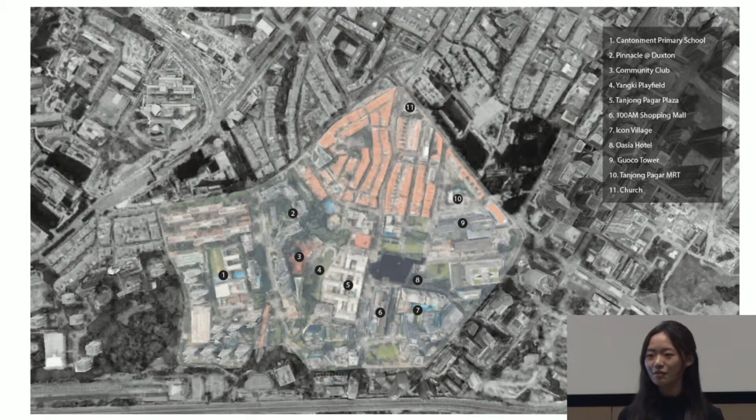Then I began to look at the voids and the edges within the Tanjong Pagar area and found the cracks between the buildings, and found the opportunities, which I named a new urban void.

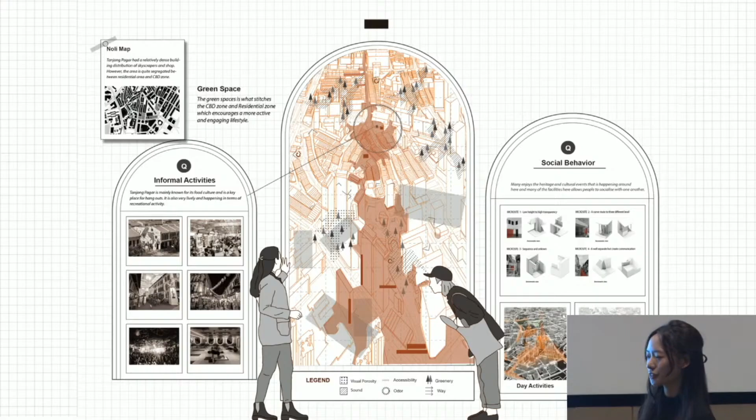So in this project, I want to propose a new typology for social unity and the living essence of heritage. I will begin to explore my project through spaces, structure, and program.

First is how I explore my design space in this process. First, I'm learning and activating from the informal microsites that people used to gather in society. As Henri Lefebvre says, the city is made up of rhythms—of people, of objects, of spaces.

Therefore, I use rhythm analysis to look at the voids and the cracks inside this society, and I found some conflicting rhythms—that migrant workers and locals tend to stay at places that are informal and unpolished, like the spaces in back alleys or under HDB buildings.

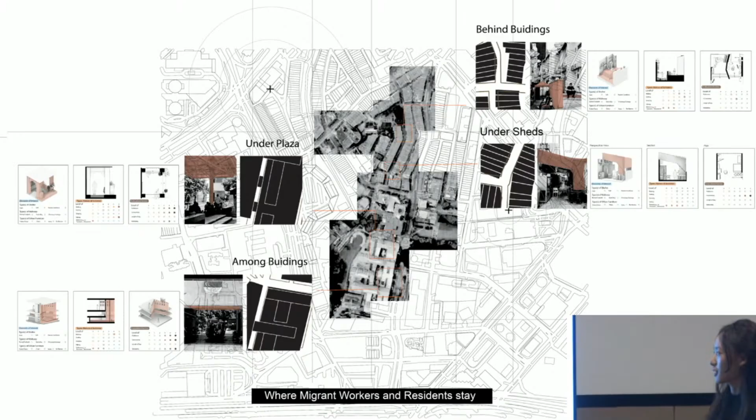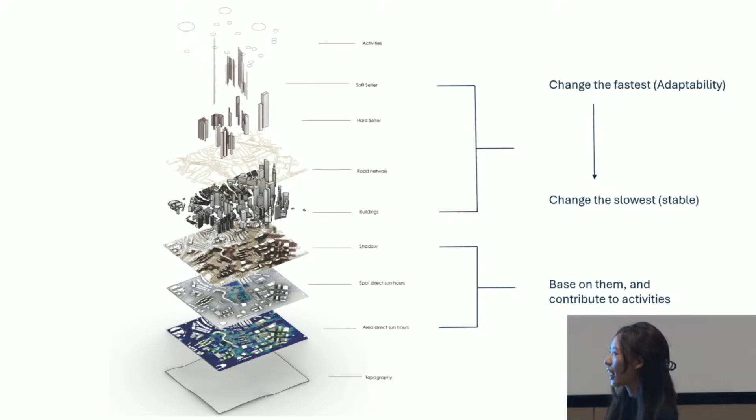And they often build up their own soft shelter there. So the contrast between the soft shelter and the hard shelter has inspired my investigation into how flexibility and human scale can reapproach our means to architecture.

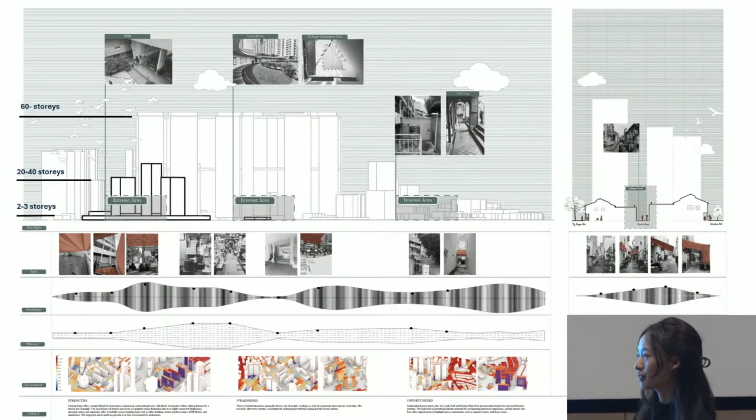Especially since Tanjong Pagar is a place full of contrast, from the tallest building in Singapore to the smallest traditional building on Trust Street.

The second is about the structure. As a foreigner looking at Tanjong Pagar's urban evolution, I found a strong tendency toward eliminating randomness.

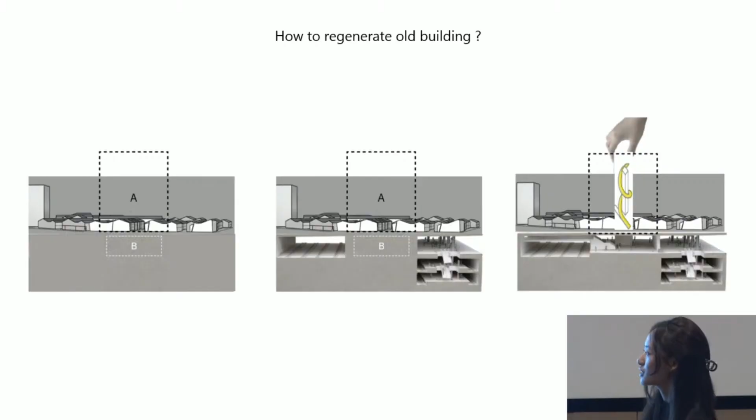So how can we regenerate the old building? I propose that by activating different layers of the buildings, we can open up new opportunities for the locals and different people around the world.

Last but not least is about the program. This is the DNA of my design—the different festivals of different ethnic groups, people around the world. By carefully tackling the spatial quality and the common materials used in those festivals,

we can create a space where people can celebrate their festival at the same time, at the same place, and get to know each other deeply.

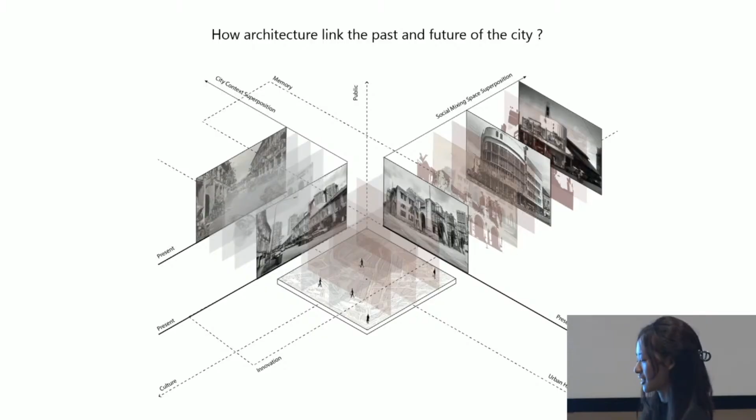So in the 21st century, how can we get to know each other? I think only by truly knowing each other and fostering social unity, and by sharing the same values of society, can we let architecture link the past and future of the city.

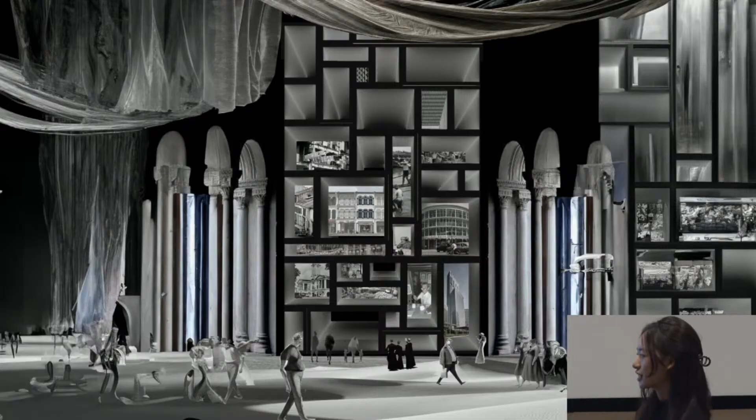So I think in the 21st century, we need urban surgery to propose a new typology as a culture catalyst. This is not just a building, this is a shared future.

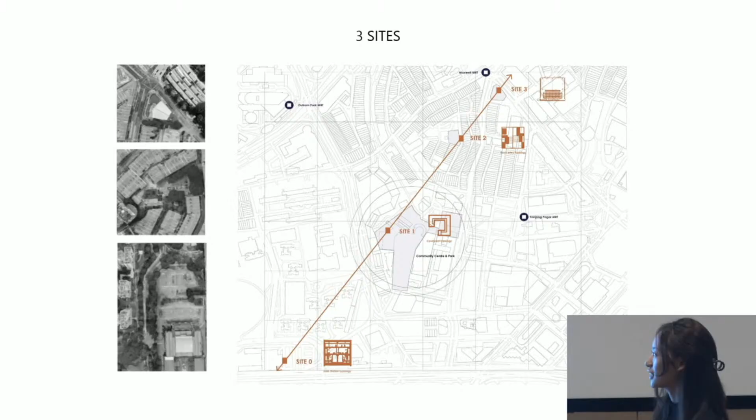So let me introduce my design. My design is located along the three sites of the axis of the Tanjong Pagar area.

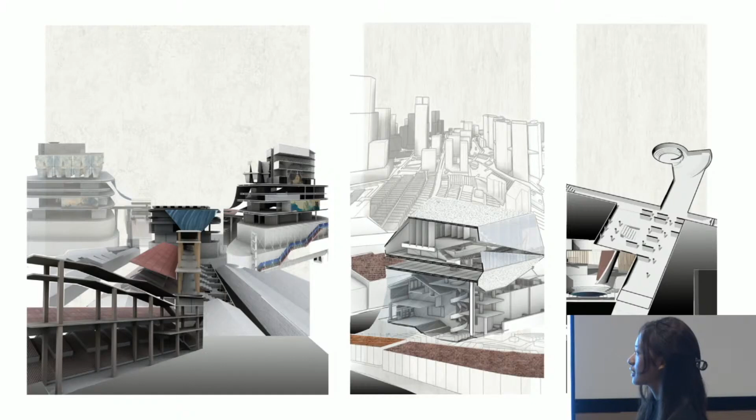By layering out different volumes of spaces and activating on, within, and layering the structure, we can create a culture catalyst that creates opportunities and chances for different cultures of people.

So my first site is the Fairfield Methodist Church. This church was once a cinema full of people, but then it became a church which is now very enclosed and detached from society.

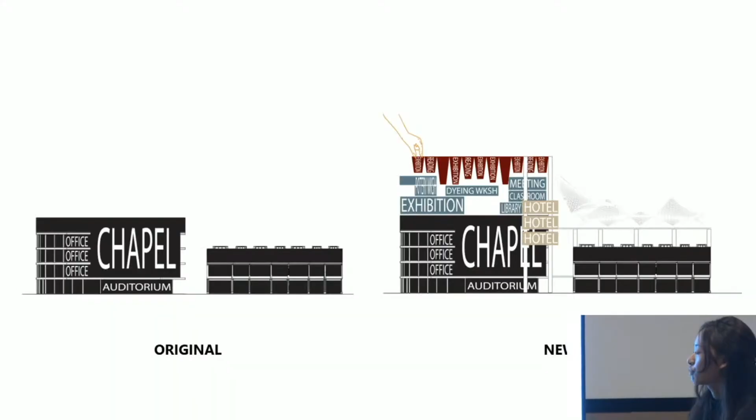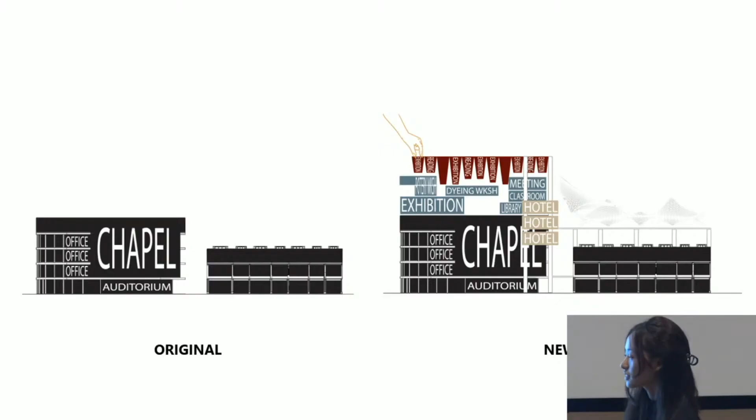Inspired by Archigram's concept of the event city, I proposed a different temporality structure above the chapel to create and work as a cultural catalyst, letting people move in. This is not just a monument. This is a place where people can gather, have workshops, performances, and enjoy their everyday life rituals.

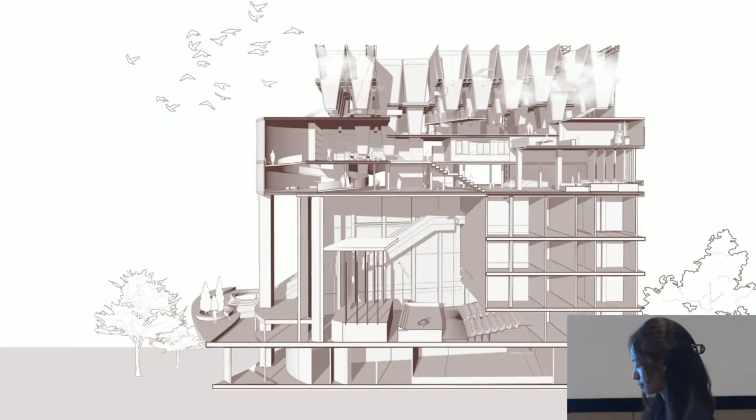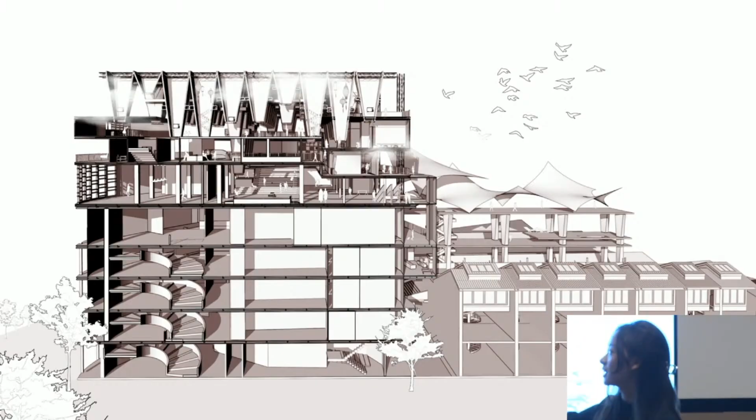As you can see, this is the section of the design. This is by learning from and activating the soft shelters that migrant workers used to create, where all the voids and volumes interact with each other in this building to create a space that people can come to.

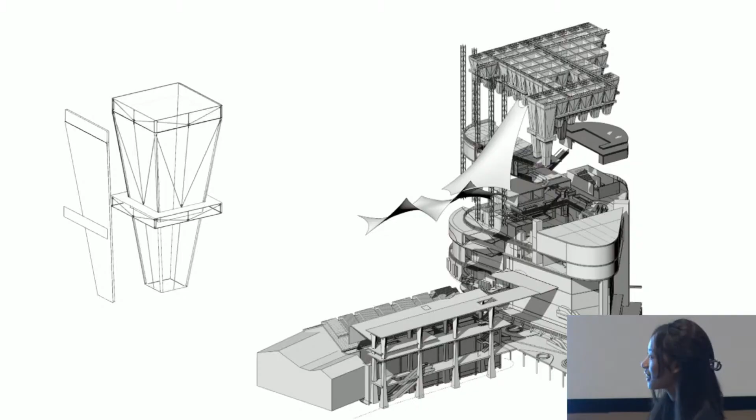So this is the evolution view of my design. I introduced three ways that people can go inside and experience this building. You may notice that along the experience, there are little voids within every space.

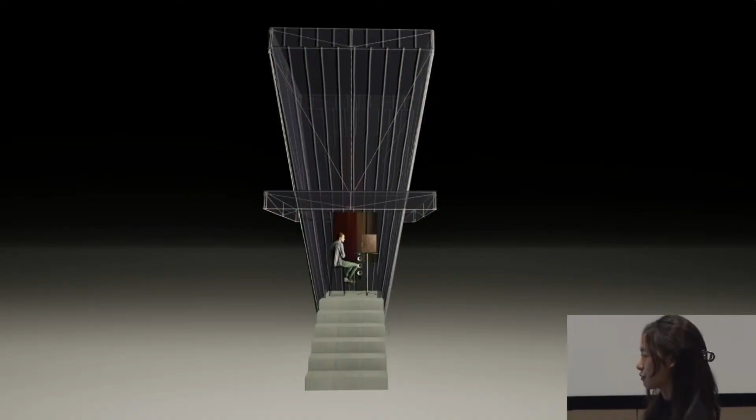So imagine a place where the city pulses. These are the little voids inserted into the existing city landscape, where people have the time to escape from the rush of society and have a place to rest in solitude.

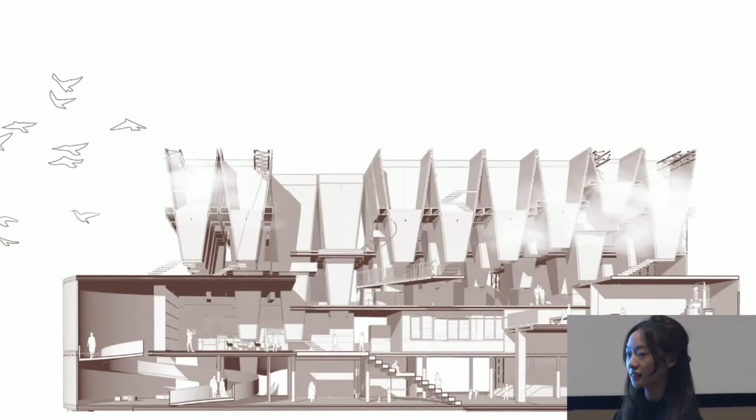Every void is a little window into a different culture. Inside the voids, there are lanterns and lots of embedded projected history that people can learn and study from other cultures. After that, they'll go to their festival spaces to share their festivals and cultures with others.

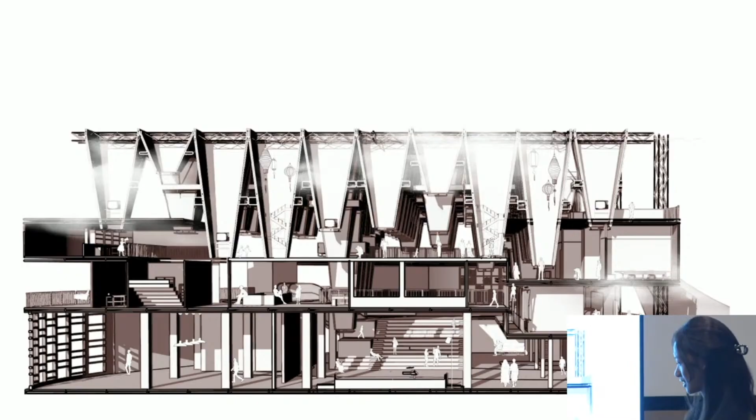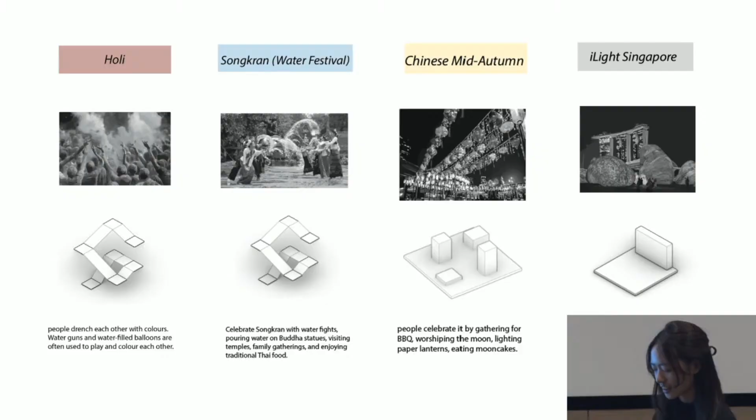So imagine a building where Holi, Songkran, Chinese Mid-Autumn Festival, or even iLight Singapore can happen in the same building. So this is a multicultural gathering device that gathers people.

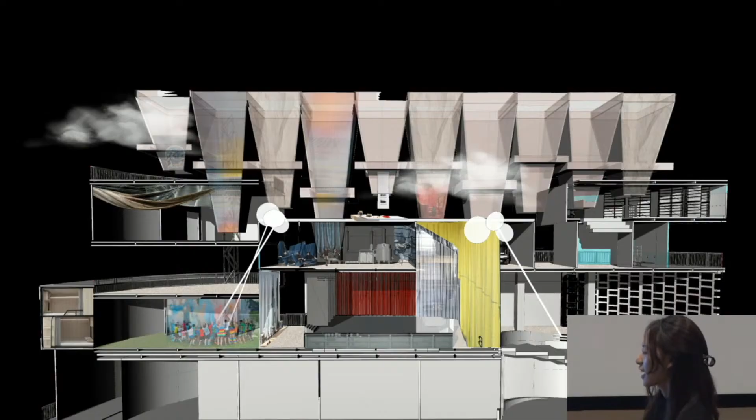Like the water used in the dyeing workshop can also be used in the Songkran festival. By using common and the same materials and tackling space quality, we can create spaces that engage people to come in and embrace the unplanned.

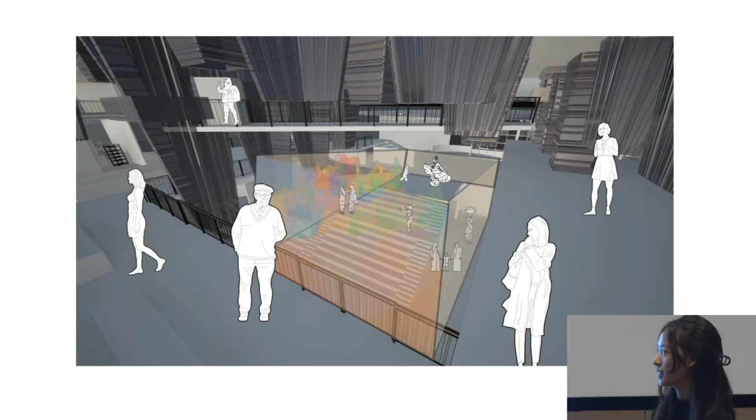Events to happen. So when the holidays happen, these temporary skins will be activated, and the powders of Holi will become art on these little skins. It can also interact with the exhibition and with iLight Singapore, so people can be part of the participation of the artwork.

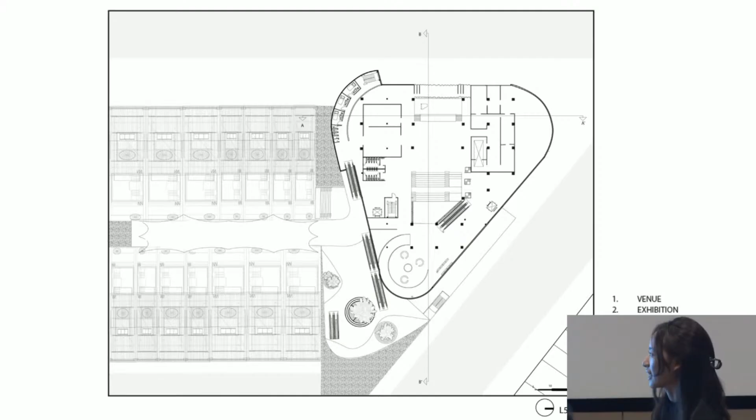And also here is the capsule hotel for foreigners who first came into Singapore and want to know each other's culture. They can stay in this place.

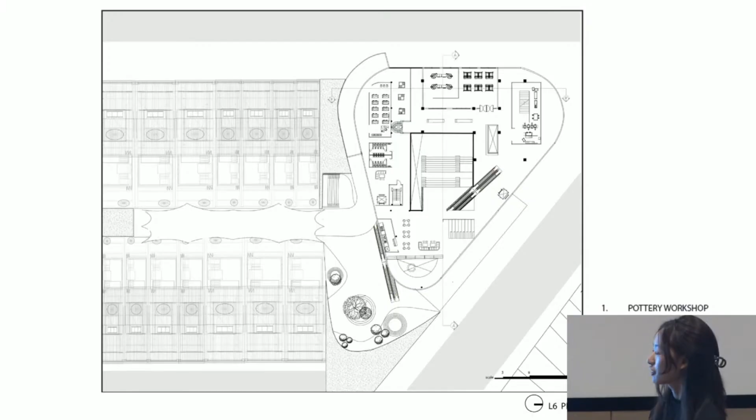And at the sixth floor, you can see the pottery workshop and the dyeing workshop, which is for sharing the craftsmanship of tradition in Singapore. The final projects of the workshops can also exhibit in the exhibition.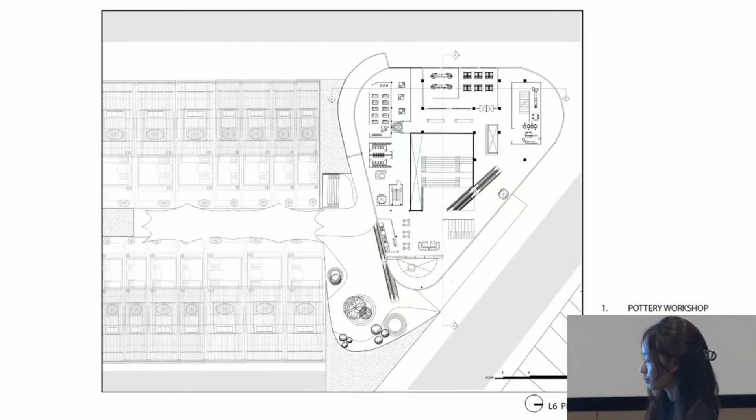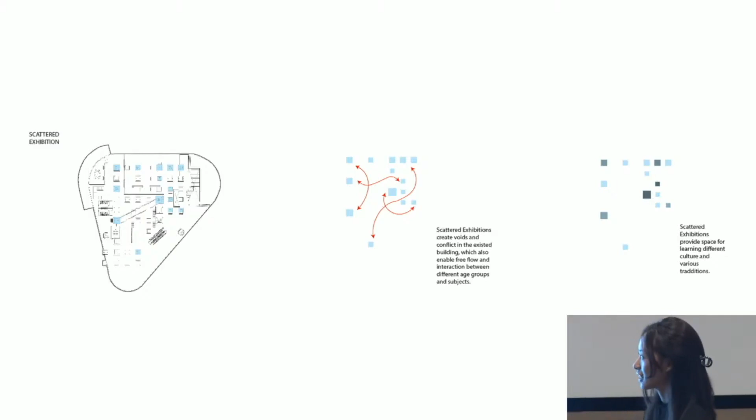So from the experiential field, people walk in and flow in and out of this cultural catalyst. Three concepts guide this design: the scattered exhibition, the community, and the festivals.

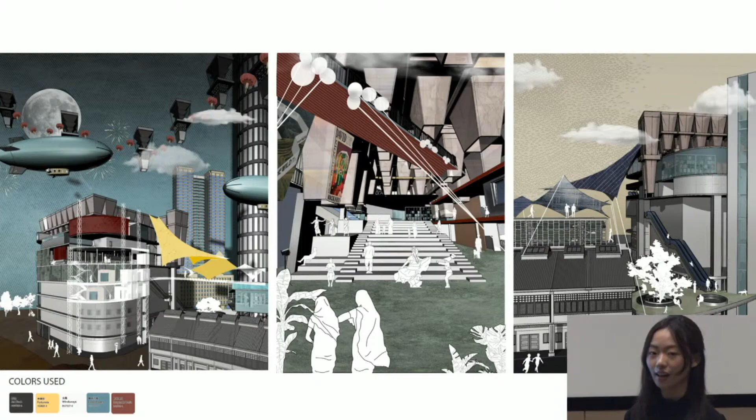After all, this is the glimpse of the future. This is a shared future where people can host unplanned events, and people can come in to share their same culture and festival at the same place, at the same time, spontaneously. If people want to get married in the central void, they can.

If people want to host a flea market in the central void, they can do that too. The second site is the Tanjong Pagar Shop House Alley, which was once full of people, but now is polished for tourists, and the local force has gone.

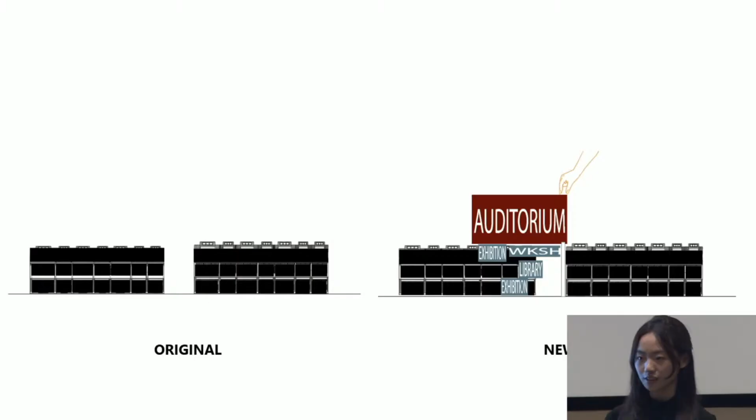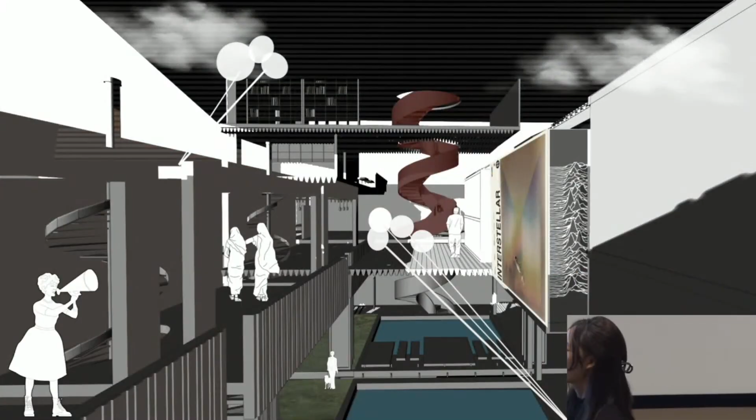I then inserted a small auditorium for the local voice. At this view, you can see how people flow in, and this is the view when people go through the urban corridor.

And this is not just a place for preserving history, but also becomes an urban pulsing machine for a city that can reconnect rituals, like people sharing, creating a festival, cooking, or chatting in the spaces. The third place is the Yan Kit Playfield, which was once full of joyfulness and family.

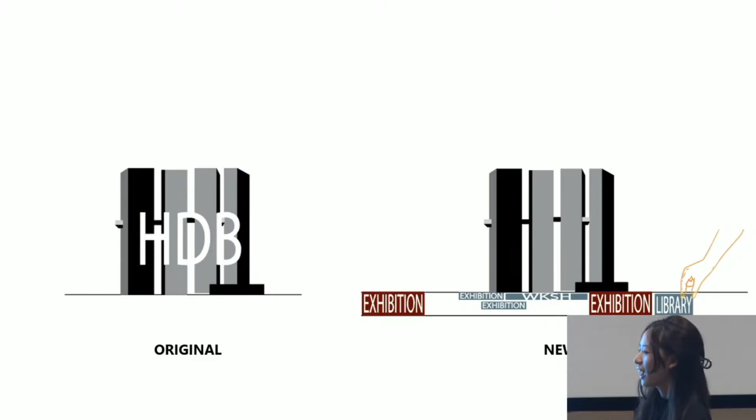In this swimming complex, but now it is removing the randomness and becoming empty, with only the grass and the tallest HDB, like the Pinnacle Duxton, in Singapore. So instead of just activating the upper layer, I introduced exhibition and workshop spaces and markets beneath the area.

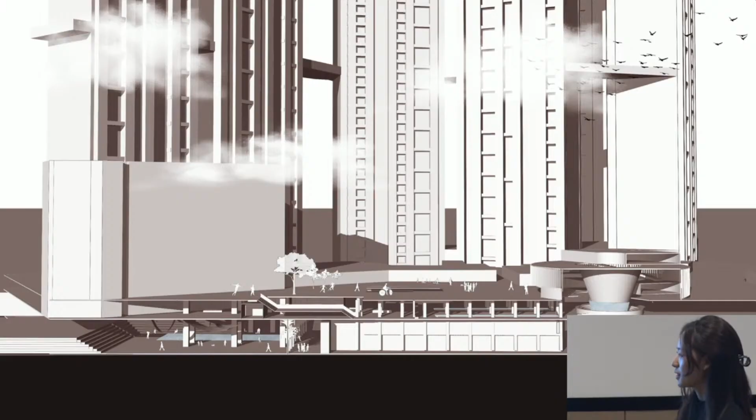And this is the section where people can have their memory of the water again, not only spatially but also emotionally, which creates a big contrast between the upper noisy society and the lower level, a place where people can have reflection.

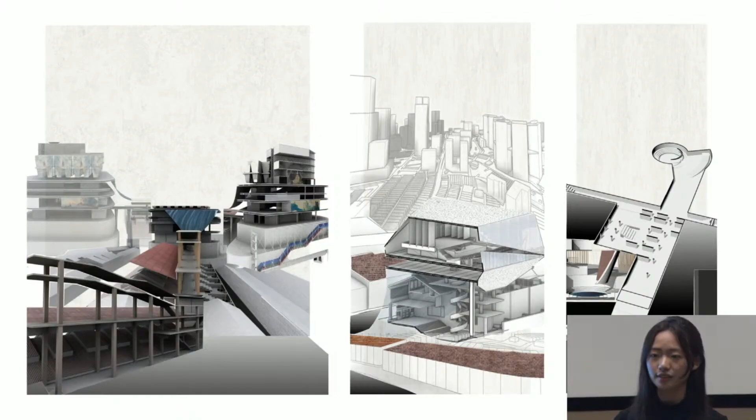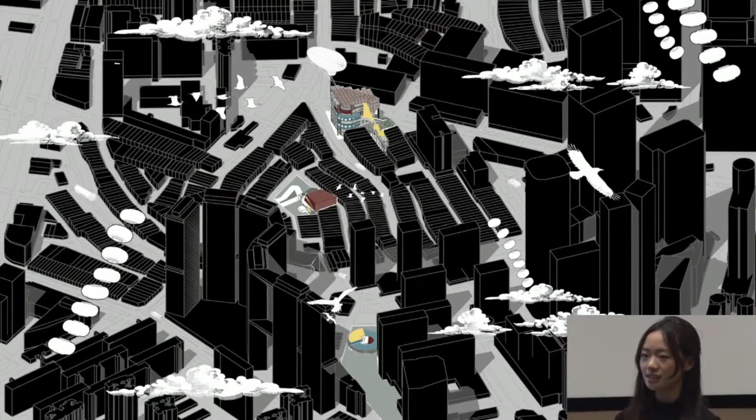So last but not least, this is the cultural catalyst. It's a new typology in the 21st century. I think every country should have one, because in this century we are detaching from other people. If there is a machine that lets us truly understand each other's culture, then we can foster social unity and have the same essence of living heritage.